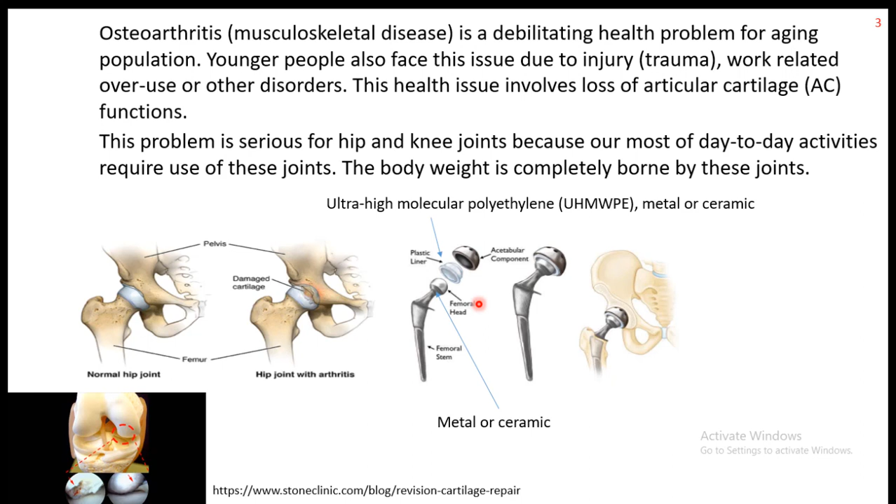If you look at our joints, it is a hierarchical structure of cartilage. Basically the bone is covered with cartilage, and cartilage is extremely smooth and a very lubricating surface. If you go into the structure, you will find that this cartilage has got the deep zone, the middle zone, and the superficial zone. The superficial zone is the one which is actually interacting with its counter surface.

In a healthy joint, as you can feel, the joints are very frictionless. Friction is extremely low. This is the characteristic of the lubrication system. Many lubrication theories have been proposed. It is believed that this lubrication is basically a mixed lubrication.

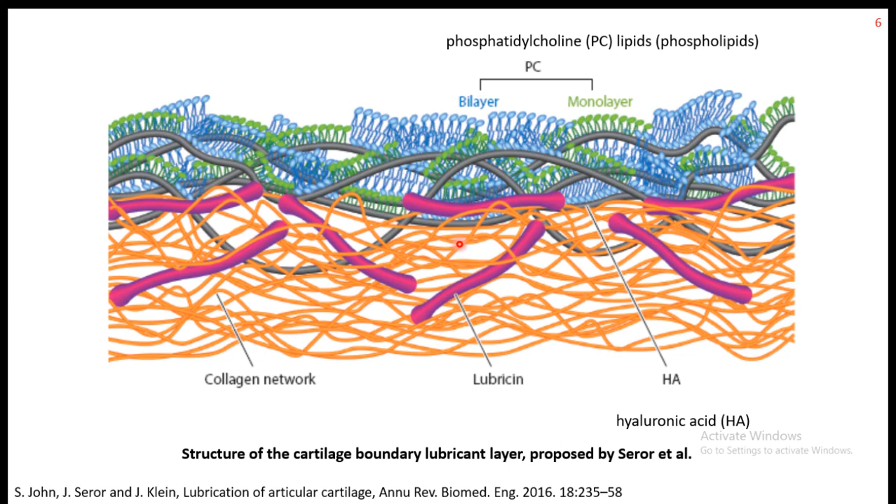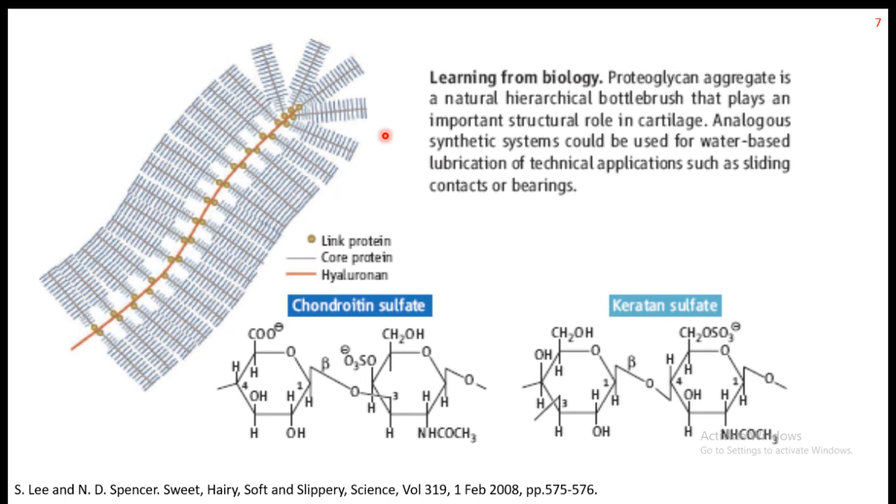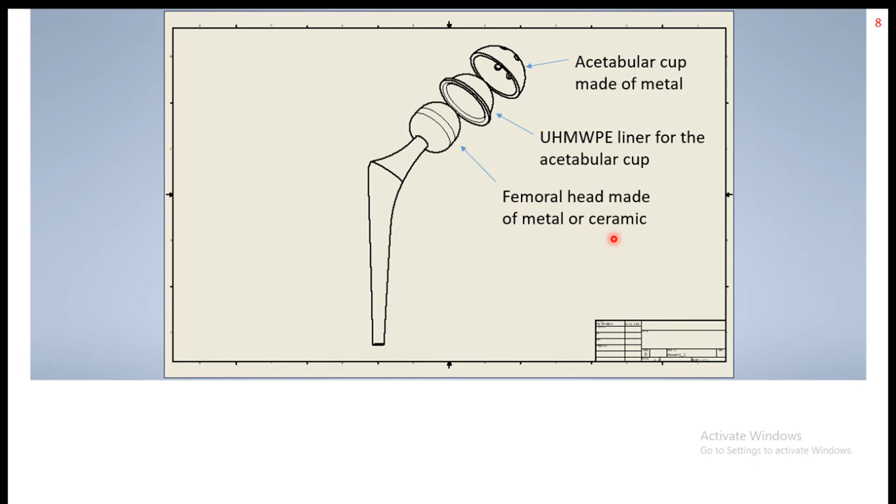Now here is more detail about how the implant is made. This is the acetabular cup made of metal, on the pelvic side of the bone, and this is on the thigh bone or femur, and this is the femoral head. So the sliding will take place between the UHMWPE liner, which is attached to the acetabular cup, and the head part, which is made of metal—cobalt, chrome, molybdenum—or it can also be made of ceramic.

UHMWPE has been the polymer part of hip and knee prosthetic joints since the 1960s. If you go into the history, this is a very successful polymer, and it started with Charnley, who introduced this polymer, and it worked very well.

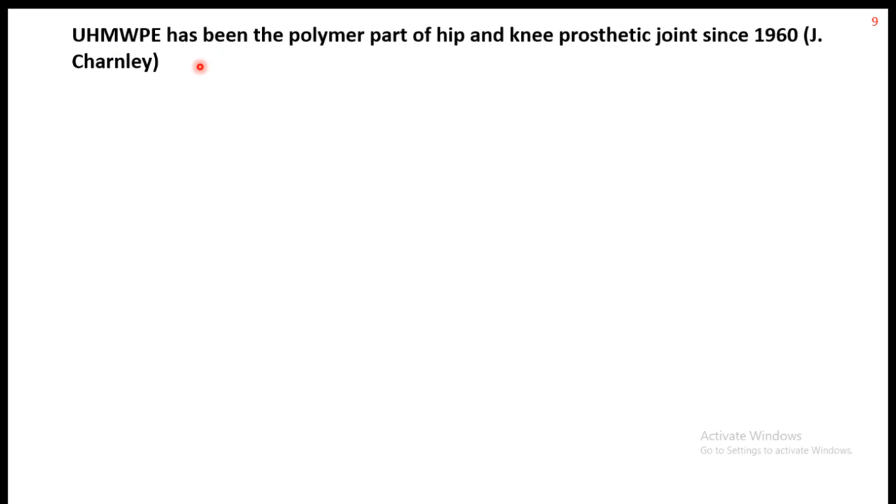Later it was further improved by cross-linking, so cross-linked UHMWPE showed improved mechanical properties. However, wear and fatigue properties deteriorated because of oxidative degradation, since cross-linking using gamma irradiation produced many radicals, which led to oxidation of UHMWPE.

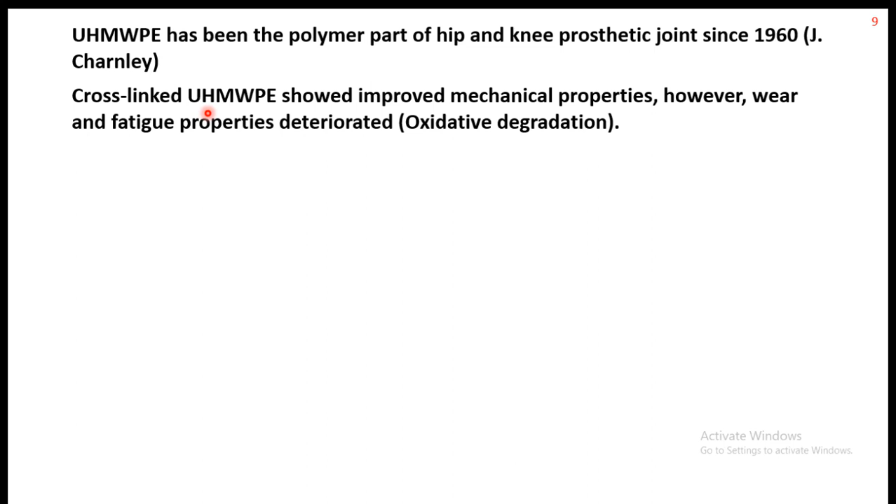Later vitamin E was included, and this solved the problem of oxidation because it acted as an antioxidant, and wear and fatigue problems caused by oxidation were reduced. So vitamin E has been used for cross-linked UHMWPE to improve its wear and fatigue properties.

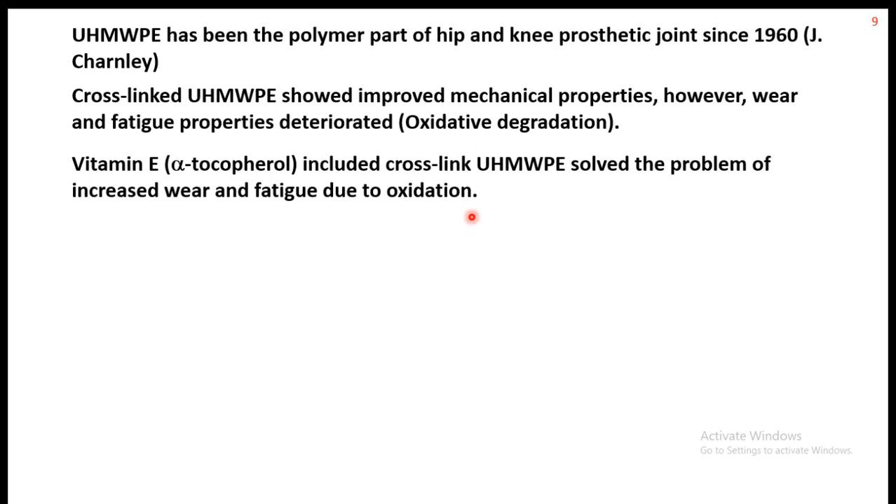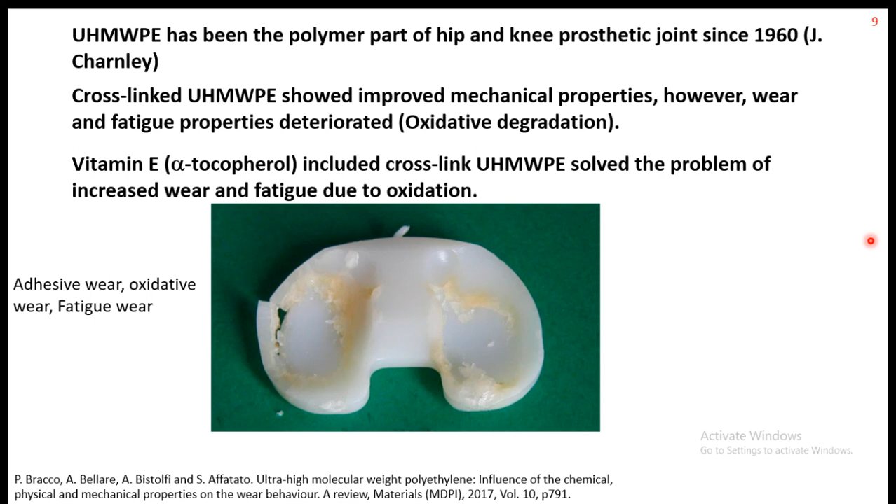The wear particles are not good for our body because these wear particles are taken up by macrophages. Macrophages exist in our body to consume foreign elements, whether bacteria, virus, or wear debris, which are micron to submicron in dimension. People have found that in tissues, UHMWPE particles are taken up by these giant cells, and the body reacts to this.

This means some inflammation and swelling will happen on or near the joints, and this can eventually damage the implant itself, meaning the implant has to be reinstalled. That means revision surgery, and revision surgery is not a desirable option for any patient.

So our goal is to make sure that the debris particles that come out of UHMWPE are as few as possible, and if they do come out of the implant, that they are not considered harmful by the body.

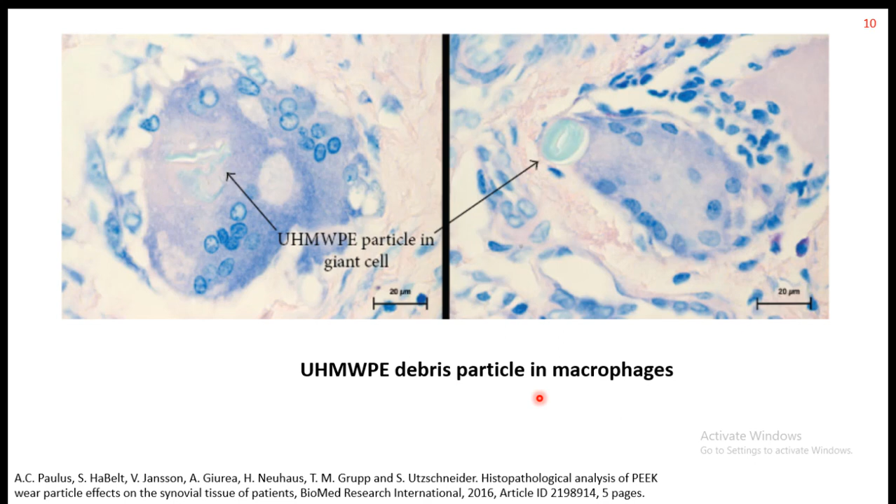Let us try to understand these materials we are working with. Basically these are within our control, the materials we use, UHMWPE and others. If you work with UHMWPE, you will understand the coefficient of friction it shows. In general, in dry interaction, meaning UHMWPE dry sliding against a metal surface, you get quite a high coefficient of friction. But with lubrication using bovine serum liquid, the coefficient of friction comes down, showing that it responds to lubrication.

In general, the specific wear rate we see is in this range, around 3.93 times 10 to the power minus 7 millimeter cubed per Newton meter, which is the unit of specific wear rate. We always compare this number whenever we try to replace or improve UHMWPE. At least the wear rate should go down; only then can we say we have improved the material.

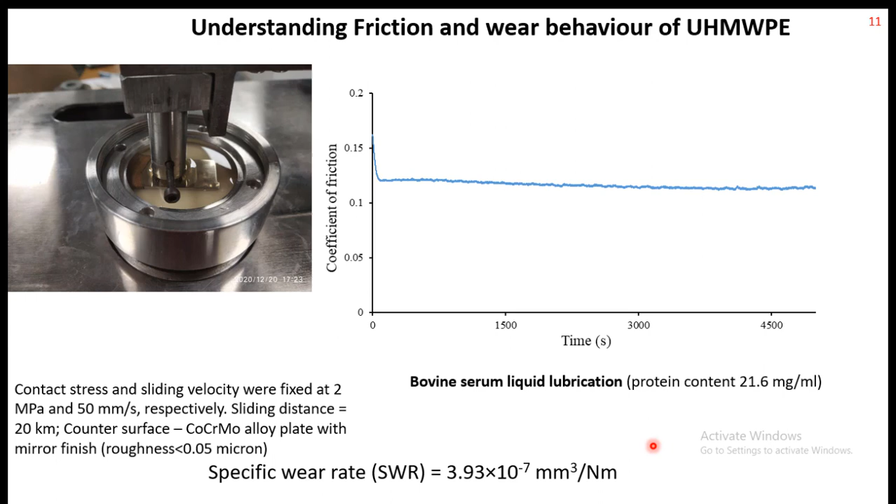So what other material options do we have? We can make composites of UHMWPE, adding particles or fibers to it. Another material that has been tried is PEEK, or polyether ether ketone, and its composites. Hydrogels are another useful group of materials, and the most famous hydrogel is PVA, or polyvinyl alcohol.

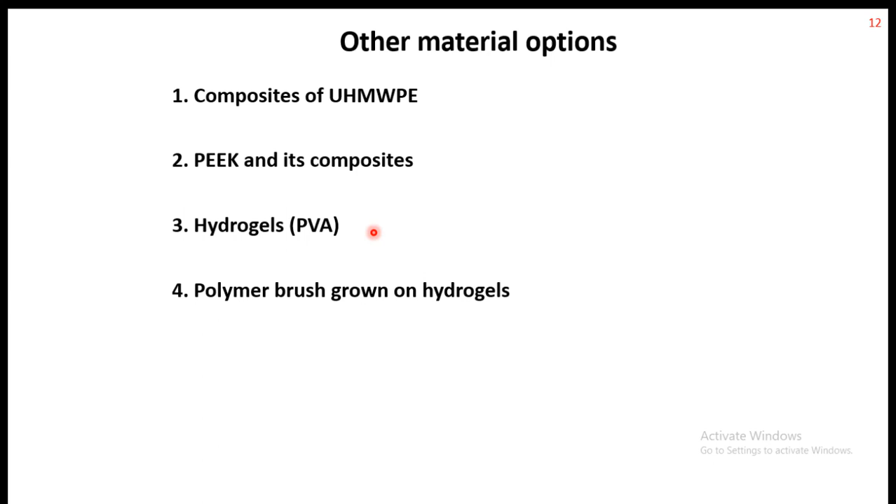Then there's polymer brush grown on hydrogels. Different kinds of polymer brush have been prepared, and they basically mimic the proteoglycan behavior, which also acts like a brush. If we have these brushes on top of hydrogels, then perhaps this can mimic our cartilage to some extent.

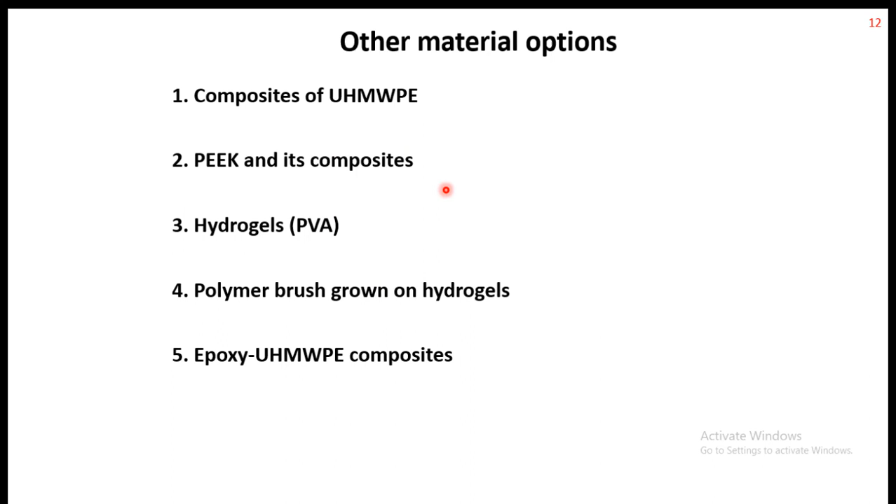Another combination of material we have been working on is the epoxy and UHMWPE composite. I will show you data on these alternatives to UHMWPE, as well as on the fifth one, which is our research topic.

So for example, if you look at the literature on UHMWPE composites, here for example Multiwall CNT has been added to the UHMWPE. Wear rate has gone down, and friction coefficient has also gone down in dry condition as well as in lubricated condition. This is for dry condition, and this gray one is for lubricated, where they used distilled water as a lubricant.

Here I should say what kind of lubricant we can use. Many times researchers use distilled water, but also people use bovine serum, which is closer to our actual synovial fluid. So the wear and friction behavior will depend upon what kind of material we use as a lubricant, and dry property will be quite different. We generally start with testing in the dry condition, and later move on to the lubricated condition, which is closer to the actual joint.

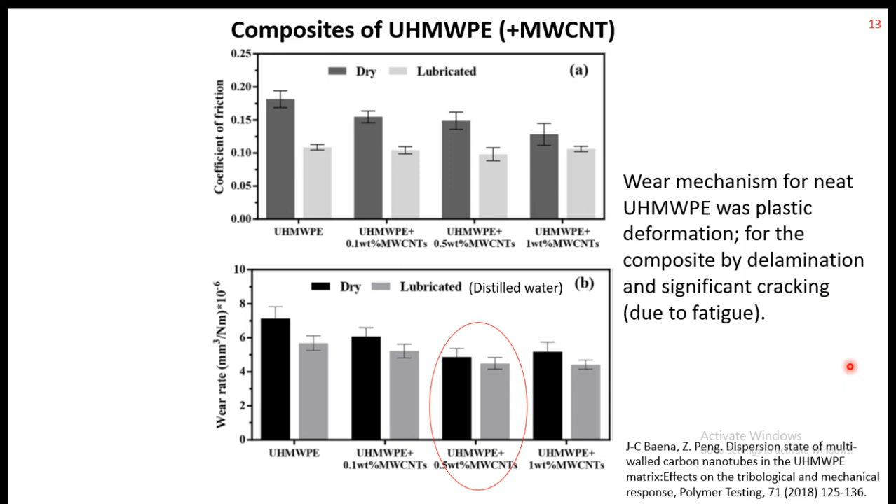Some of our works have also been represented here. We prepared specimens of pure UHMWPE, then UHMWPE with PFPE coating, which is perfluoropolyether, then 12% nacre UHMWPE, and some percentages of CNT. These tests were conducted on a pin on disc apparatus, so these specimens acted as the pin, and we had a disc of stainless steel, sliding in bovine serum as the lubricant.

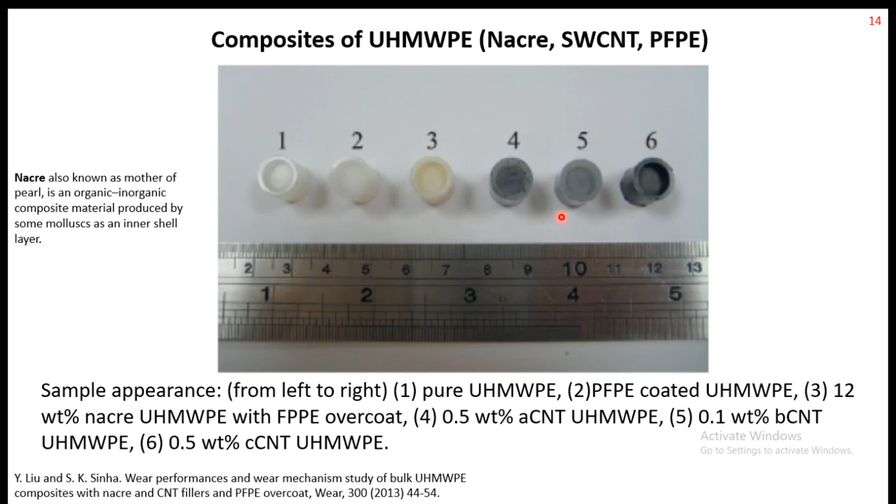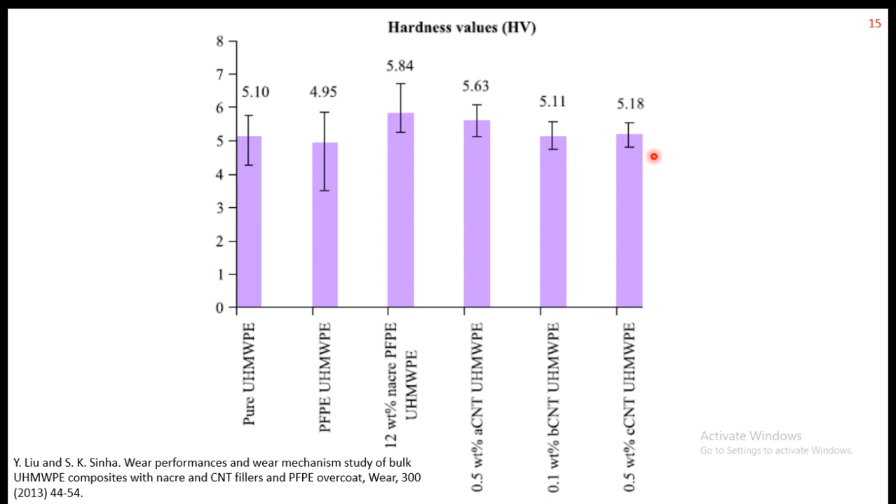First of all, when we conduct this kind of tribological research, we start with finding out the mechanical property, the bulk mechanical property, and we find out the hardness. Hardness will change if you add some fillers. However, in this case we have seen that the change is very minimal, not much, except in one case. So more or less the material remains the same in terms of its bulk property.

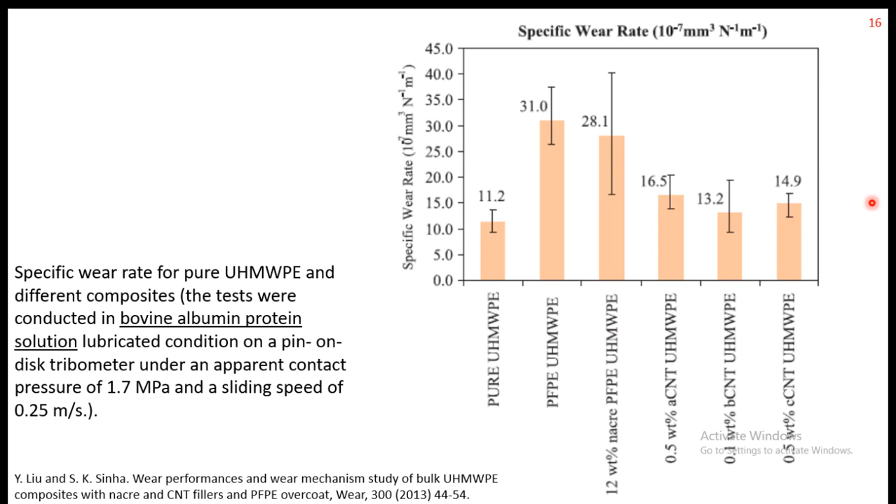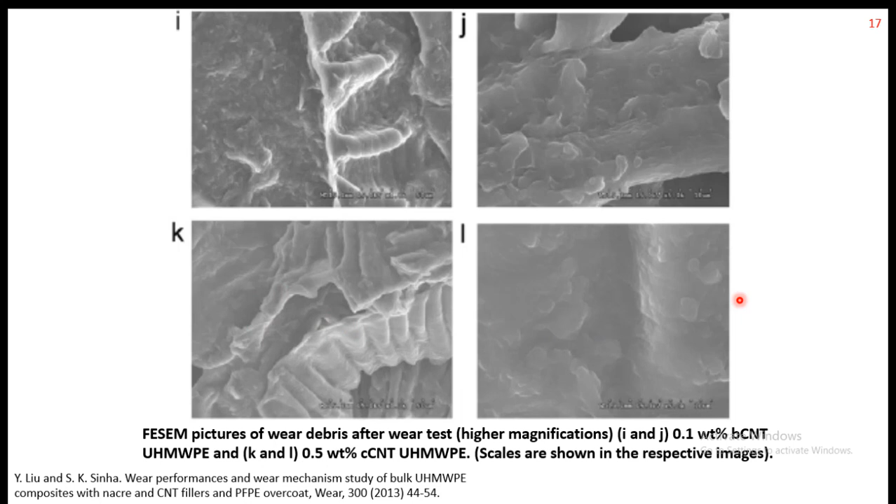So in our work we concluded that particle reinforcement or liquid lubricant such as PFPE added to UHMWPE has not improved wear resistance, or the improvement was very minimal.

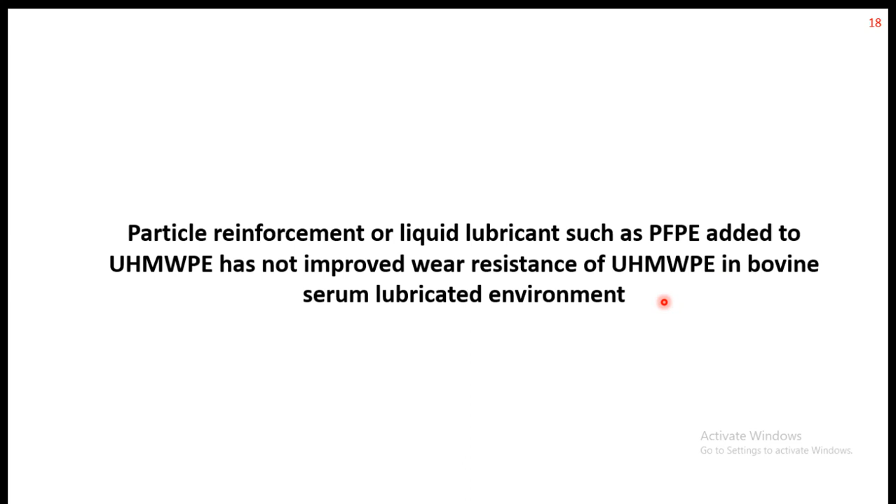Other types of composites people have formed involve adding carbon fiber to UHMWPE. As we know, adding any kind of strong fiber like carbon fiber, Kevlar fiber, or glass fiber will improve the bulk property, and in many cases it will also improve the tribological properties. So here we have carbon fiber addition to pure UHMWPE, for dry sliding. Again, the apparatus was block on ring, with liquid or in dry condition.

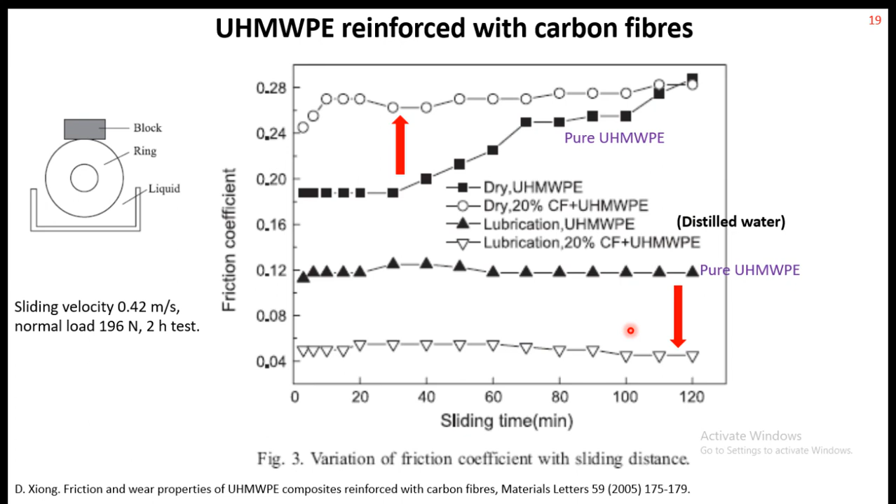For dry condition, the composite gave a slightly higher coefficient of friction, but for the lubricated case, comparing pure UHMWPE and the carbon fiber composite, there is a drastic reduction in the coefficient of friction. So here we see that having carbon fiber in the matrix of UHMWPE has helped in the lubricated case. Again, the experiments were done using distilled water lubrication, so we need to also check how the results will look if we use bovine serum as the lubricant.

Again, I should tell you that in bio-tribology we may start with pin on disc test, but we have to move on to a cross shear type of test. One such test is called multidirectional pin on disc, or MDPOD. Beyond that we should use a simulator. All these tests are done in vitro, so we need to evaluate the performance of the material in a simulator before any further in vivo trial can be done. So it's a long process.

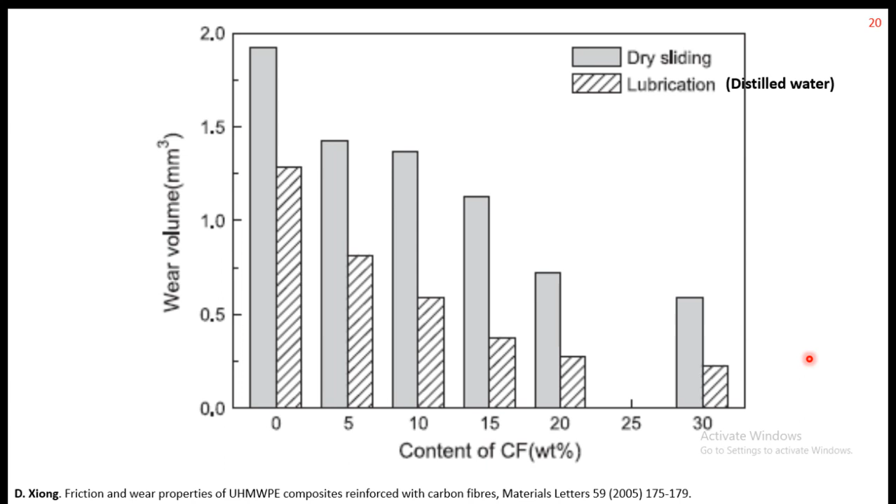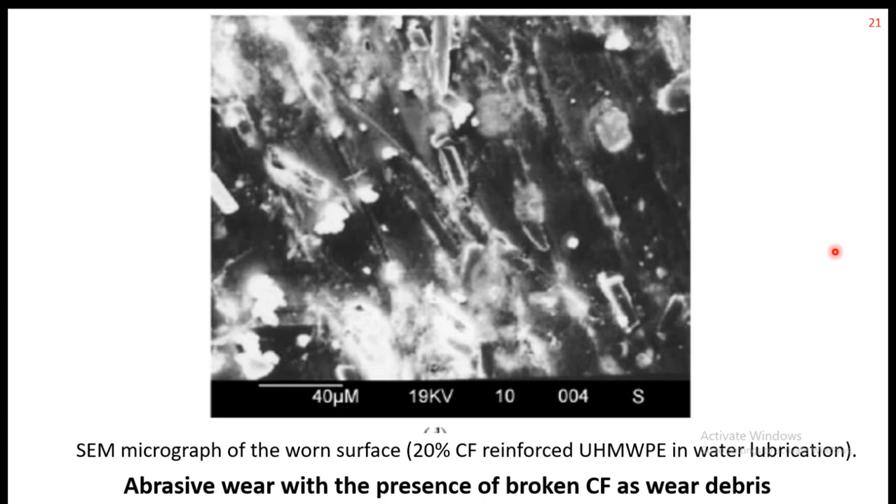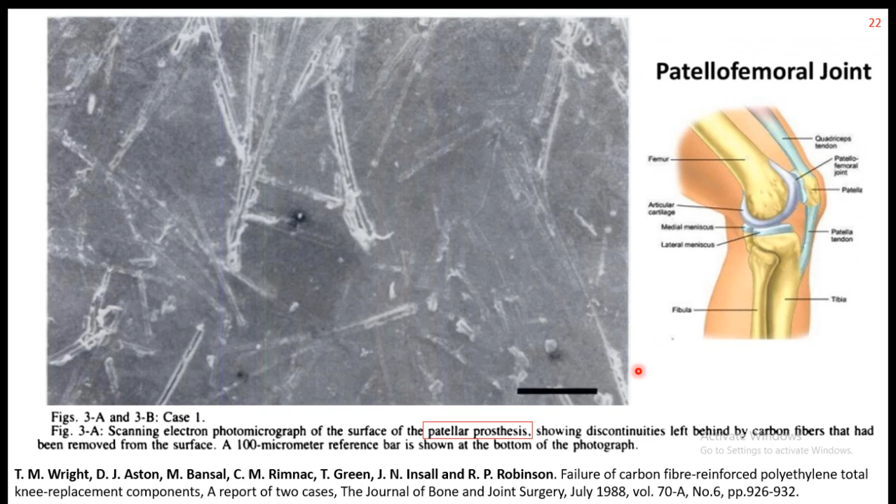In fact, UHMWPE and carbon fiber composite has been tried clinically. This is a paper where failure of carbon fiber reinforced polyethylene was studied. In some patients it did fail, so those failed specimens were looked at, and what they found is that on the surface where sliding takes place, the fibers actually get pulled out, because these fibers are in a horizontal orientation on the surface, and they get easily pulled out because of the shear stress. This is one big issue, and because of this reason, this composite was tried quite early on in 1988, but since then it has not been tried so much.

What the authors of this paper found is that the failure was related to poor bonding between the fiber and the matrix - matrix being UHMWPE and the fiber being carbon fiber. So it was more of a manufacturing issue rather than a material issue. Perhaps this type of system can be tried again, and the manufacturing part has to be resolved - the bonding between the fiber and the matrix has to be good. Fatigue failure due to poor bonding between the carbon fiber and the polyethylene particles, and poor fusion of polyethylene particles during compression molding, was mentioned as the possible cause of failure. However, these kinds of composites have not been tried since then, basically out of fear about the issues that happened for these patients.

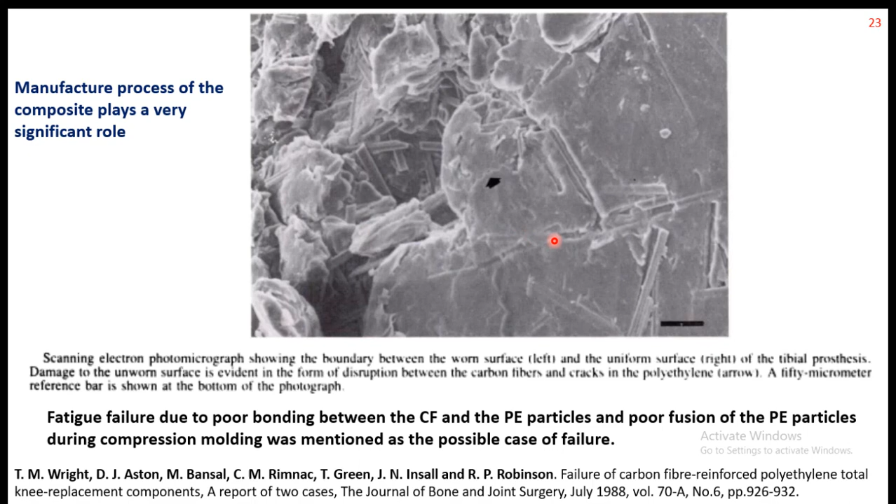Another type of combination is PEEK and its composites. As you can see in this paper, some researchers have started working on PEEK, polyether ether ketone, as a replacement for UHMWPE. PEEK is a very good engineering material - it has better mechanical strength compared to UHMWPE, almost double, and better creep resistance as well. But tribologically, PEEK is not as good as UHMWPE - it gives slightly higher friction, and wear is also high in the dry case.

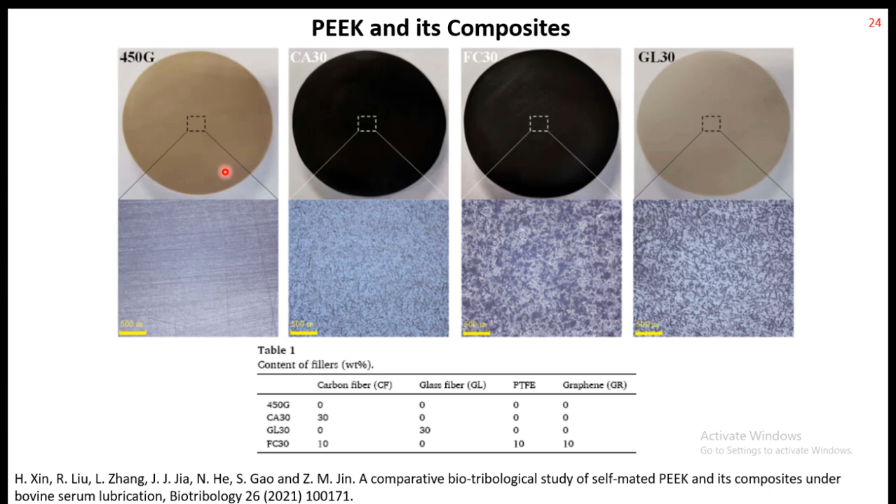The authors have tried different composites: one with carbon fiber, another with carbon fiber and graphene, and another with glass fiber, along with pure PEEK material. The new thing they tried is sliding the polymeric part against itself - another polymer - so the pin is polymer and the disc is also polymer, rather than sliding between polymer and metal or ceramic. The idea is that this can give a lighter system, and it will also reduce or eliminate the problem of metal ions being released from the metal part, which goes inside our body and causes harm. So having both sides as polymer would be an advantage.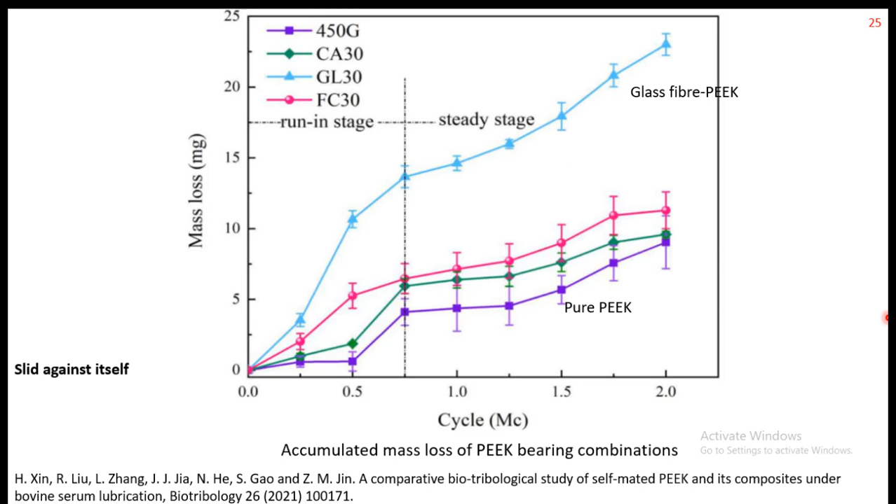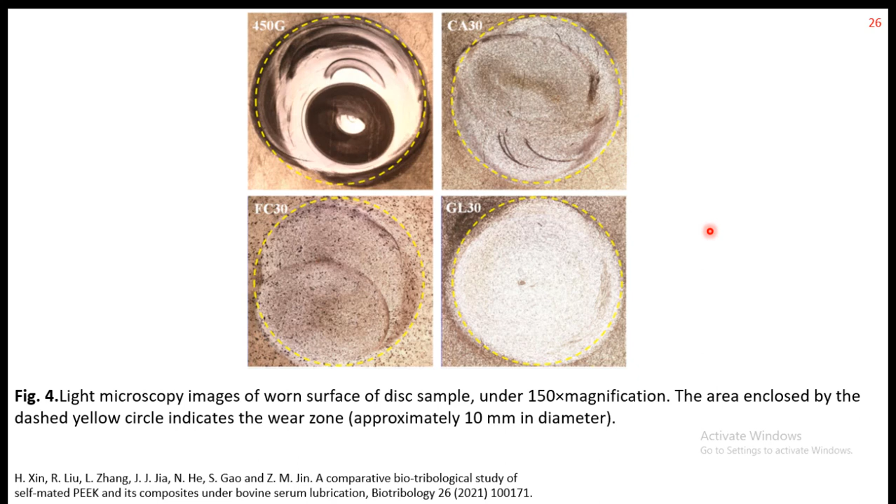It was not compared with metal, so we can only see the results of this polymeric material against polymeric material. This shows the wear surface, which gets a completely polished surface, and here you can see the glass fiber reinforced PEEK where we get a higher wear rate. So everything is within our expectation, and hopefully polymeric material against polymeric material might be another choice.

However, if we look at the failure of the polymeric composites, in this case the glass fiber one, you can see lots of pull out of the fiber. These fibers are longitudinally arranged on the surface, though in the bulk they are random. On the surface they get pulled out during sliding. As you know, this sliding is not full liquid film but rather mixed, so there is always a possibility of dry interaction between the two surfaces.

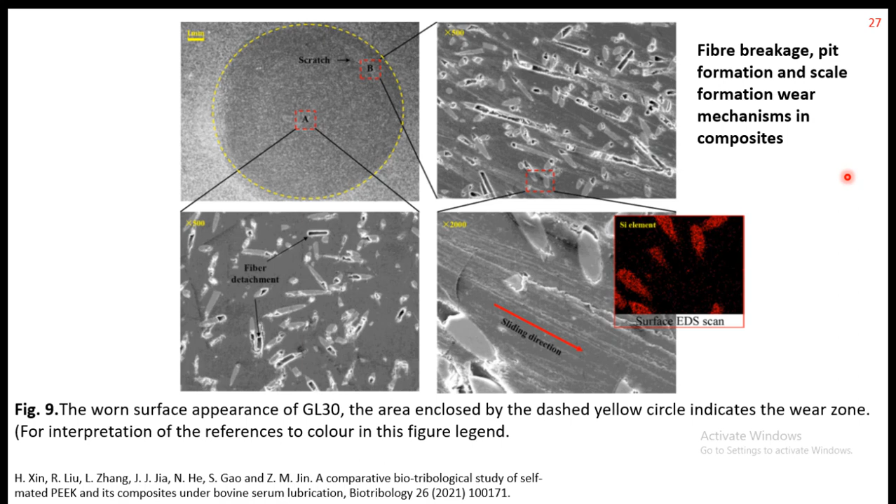In another work, PEEK was used and slid against UHMWPE. That means if we have the acetabular cup of UHMWPE, then PEEK is the other part, or the femoral head. Here we have a comparison with metal sliding against metal, cobalt chrome molybdenum.

People have shown that when PEEK is sliding against cross-linked UHMWPE, it gives far better results. The disc material is PEEK here, and cobalt chrome is this one when the disc material is cobalt chrome, and this result is for the wear of the disc part. As you can imagine, in a pin-on-disc machine test, both the pin and the disc wear out. We can see that wearing of the PEEK disc is much less compared to cobalt chrome molybdenum, and the pin of PEEK was also wearing less compared to cobalt chrome molybdenum. Overall it is concluded that PEEK sliding against UHMWPE has better results than cobalt chrome molybdenum sliding against UHMWPE.

However, I should say that this kind of result needs to be verified by a third party, because in this work the research itself was supported by the company which made the PEEK. So it needs to be verified by independent research.

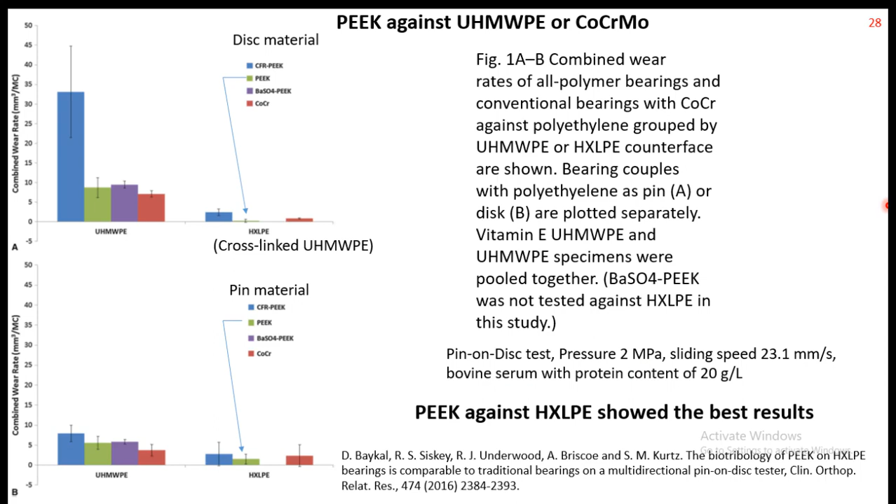Another material that we have is the hydrogel, polyvinyl alcohol, PVA as hydrogel. PVA or this kind of hydrogel is being used for many other purposes within our body system, but for the joints, hip or knee joints, this has not been clinically tested. However, in vitro tests have shown good promise.

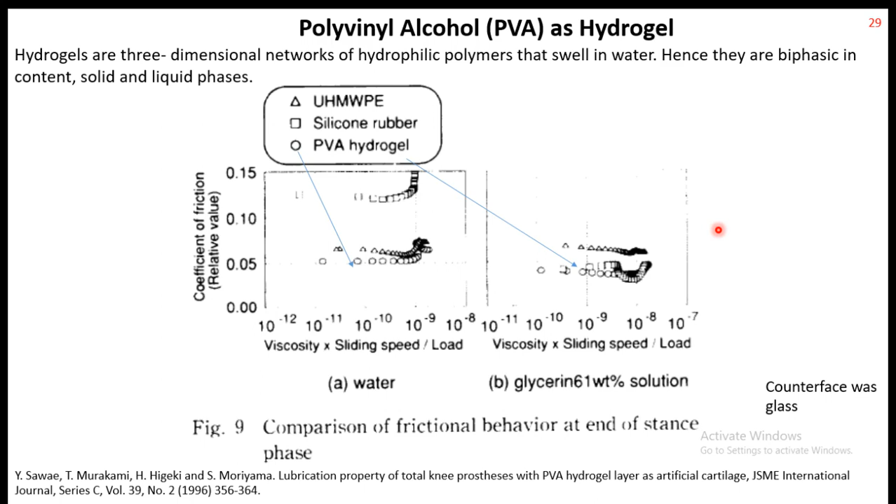Quite early on, in 1996, PVA was used and some tribology tests were conducted, and it was found that PVA gives better results compared to UHMWPE when sliding against a glass surface in a simulated lubrication system — in one case water, in another case glycerin 61 weight percent with water solution. So PVA or hydrogel is being tested by many research groups presently.

Further on, the same group conducted tests with PVA gel, the freeze-thaw gel, and the cast-dried gel. Just different ways of making these hydrogels, and it was found that PVA CD, the cast drying process, gives a better result than the FT. Perhaps the hybrid one will give some better result.

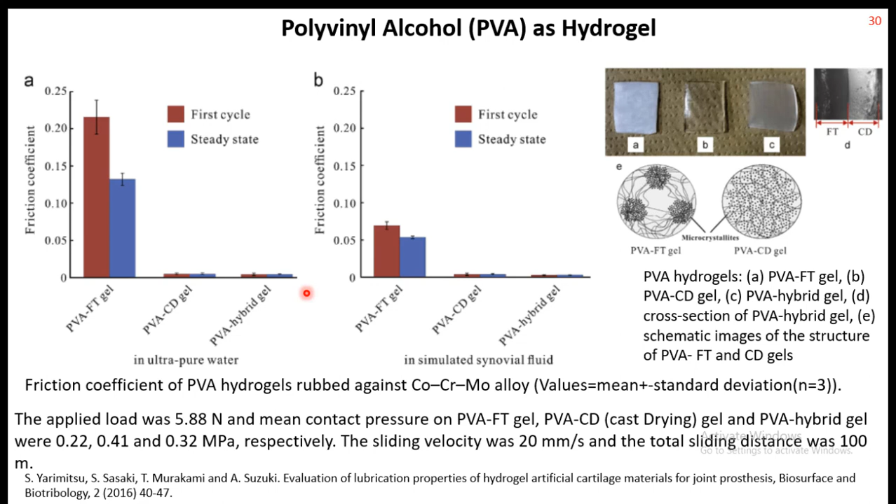These changes were because of structural differences. For example, the PVA freeze-thaw process gives microcrystallites which are aggregated at some places, whereas in the case of PVA CD gel, the microcrystallites are uniformly distributed throughout. Because of this, PVA CD is transparent, whereas PVA FT is opaque. So there is a difference in crystalline structure, and overall PVA hybrid gel, a combination of FT and CD, gives a better result. So PVA hydrogel is another choice we have, other than PEEK and UHMWPE composites.

Not much work has been done on the wear aspect of hydrogel, but some results show that perhaps PVA FT, or freeze-thaw process, gives a better result with less wear compared to PVA CD. This part needs to be properly evaluated in vitro in our pin-on-disc machine or multi-directional pin-on-disc machine, so we can understand how the PVA gel will perform in an actual system.

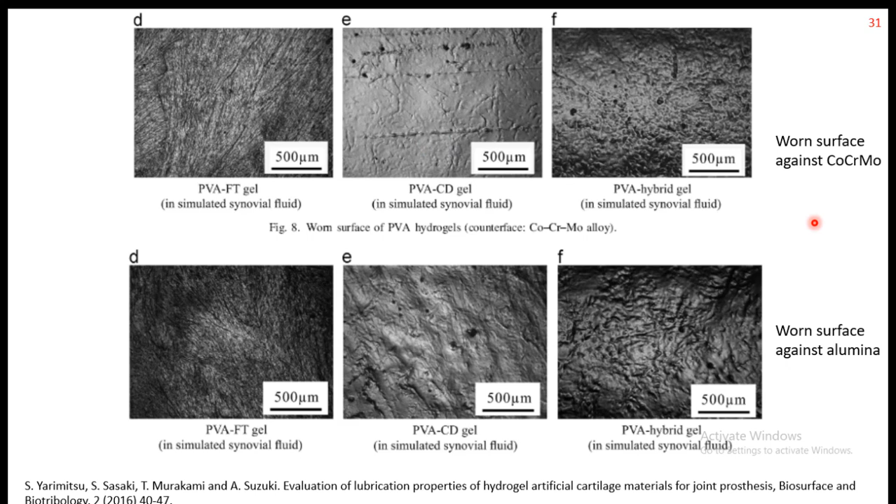Friction-wise, we have found that it gives quite a low coefficient of friction.

Another solution people have researched is called zwitterionic polymers, used as a boundary lubricant on the hydrogel. These zwitterionic polymer molecules are net neutral, just like our proteoglycans. They are net neutral yet possess both positive and negative charges in close proximity to each other, often along a carbon chain backbone.

They have strong interaction with water molecules, so perhaps this kind of polymer molecule will mimic proteoglycan and encourage water lubrication. These zwitterionic polymers can be included within the hydrogel at its surface so that they provide lubrication, whereas the bulk of the hydrogel provides the mechanical strength to the implant. Perhaps future solutions will be a combination of this kind of hydrogel and zwitterionic polymer, or some other composite with zwitterionic polymers.

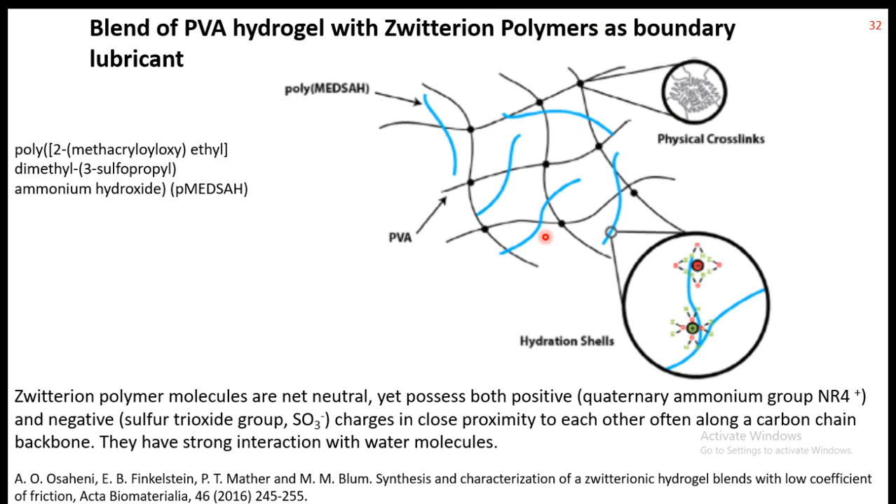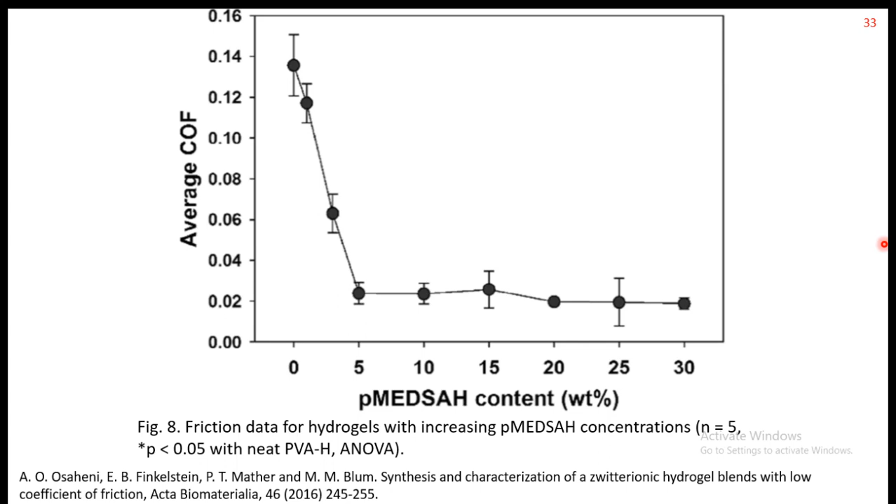In this case, they conducted a friction test and found that adding even 5% of zwitterionic polymer reduces the coefficient of friction to a very, very low value, and it continues. So the friction mechanism is well established, but on the wear side we do not have much data.

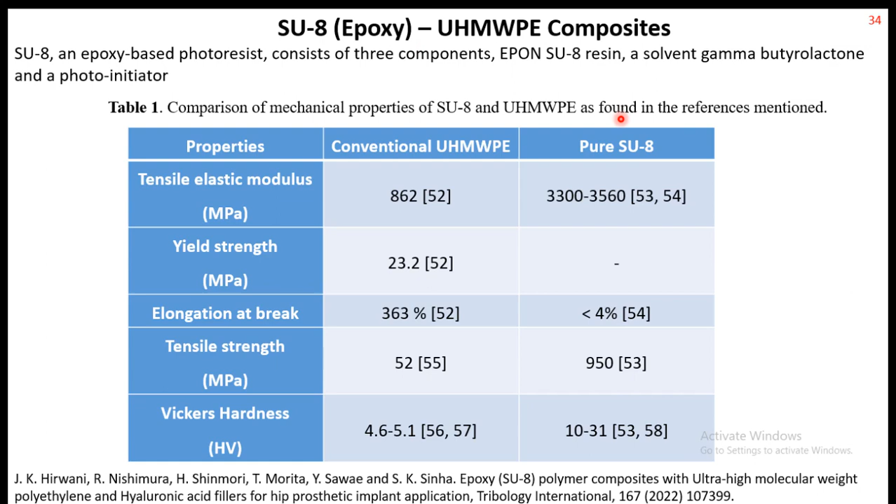But if we add these particles of UHMWPE into SU-8, it gives a far better result, as we will see.

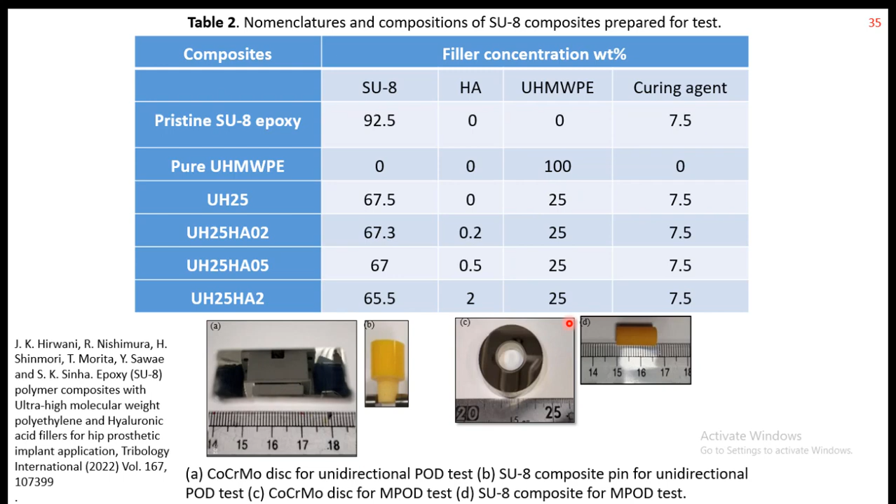The samples were made into pin form and then slid against a metal part, a cobalt chrome metal surface, in a multi-directional pin-on-disc test. I'll show you some results with different percentages of HA, but UHMWPE percentage was fixed at 25% weight, and these were also compared with pure UHMWPE.

This is a new wear test we developed. One of the problems with...

Sujit, sorry for interrupting. We're coming up to about 10 minutes left of our general hour for the event. Do you have many slides left? A couple — how many minutes do I have? We'll say another 5, then we'll do the sponsor section and Q&A. Sure, I will finish in 5 minutes.

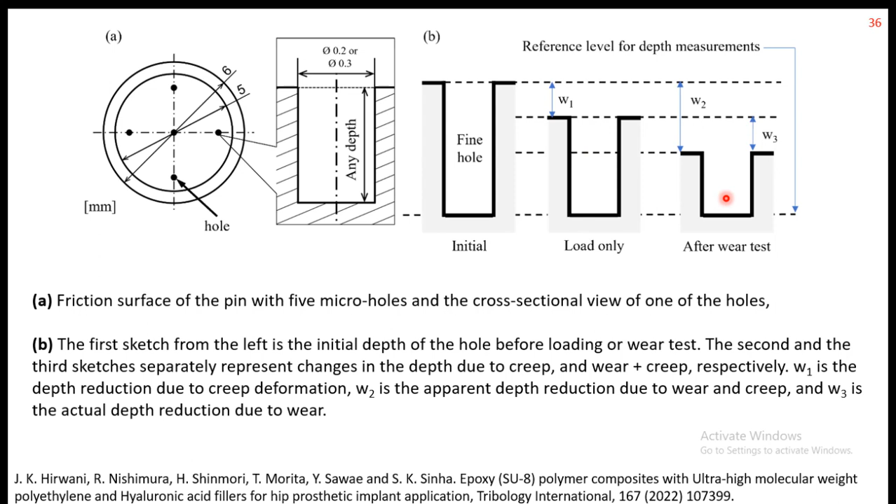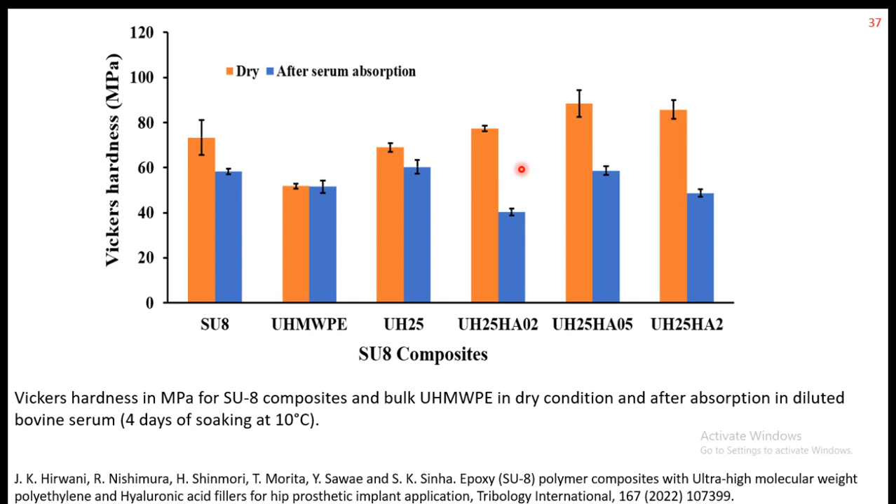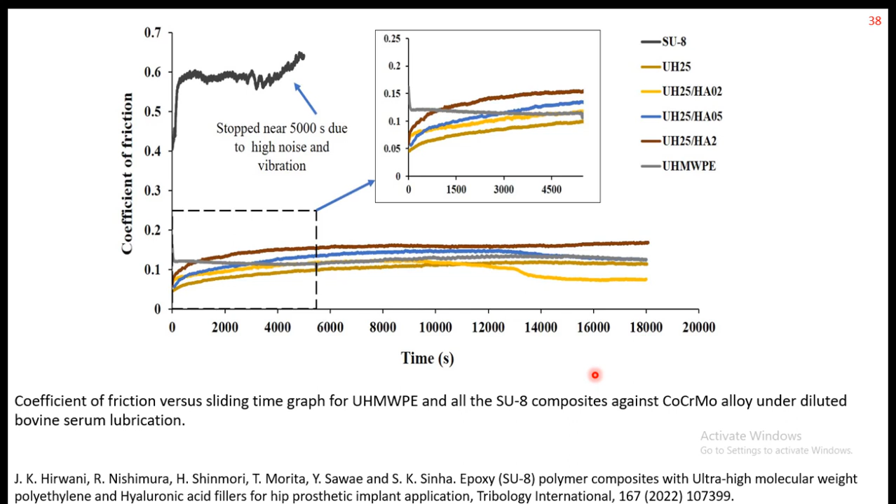It was also slid for quite some time, with the number of cycles more than 200,000. So this gives a very good system to work with.

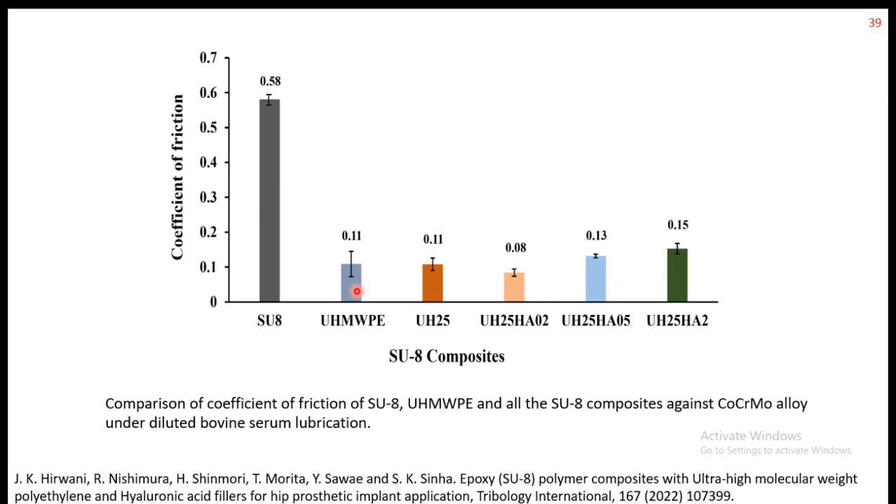In terms of wear, which is another important part, we found the average coefficient of friction in the steady state gives a low coefficient of friction for our composites, even compared to pure UHMWPE. This is very, very encouraging.

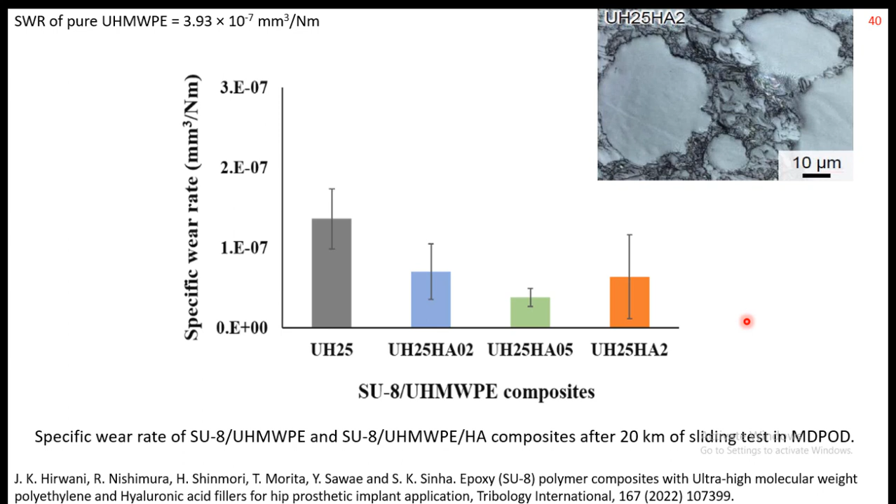We also compared the wear rate, and even though there is a lot of scatter in this kind of evaluation, our composite of 25% UHMWPE and 0.02 or 0.05 HA gives a low wear rate. This is compared to pure UHMWPE, which gives 3.93 times 10 to the power minus 7, much higher than our composites. Overall, we have achieved very good low friction and low wear conditions for these composites in our multi-directional pin-on-disc test.

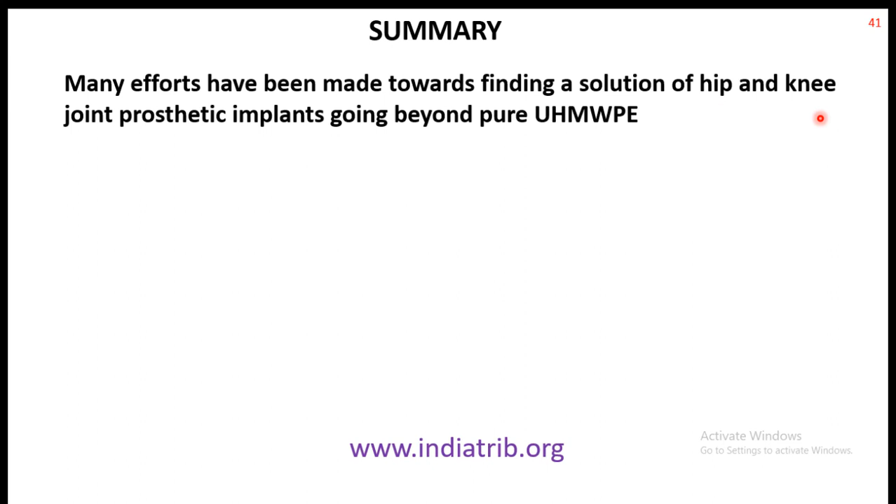So finally, I will summarize. Many efforts have been made towards finding a solution for hip and knee joint prosthetic implants going beyond pure UHMWPE. Pure UHMWPE is still a very good material, but we need to find some replacement or improvement. PEEK with cross-linked polyethylene has shown promise, but needs to be re-evaluated, and it is very important that it is re-evaluated.

PVA hydrogel, in combination with a zwitterionic polymer boundary lubrication, provides another promising material which is non-UHMWPE. From our research, we have found that epoxy, SU8, or similar thermosets with UHMWPE particles and a boundary lubricant can hold another promise for future evaluation. So this is all about what has been done in biotribology research for non-UHMWPE polymeric systems.

SRV Tribo Talks. I would like to invite you to take a look at some of the many tribological solutions we and our customers have developed on the SRV test system. For example, the SRV allows you to generate tribo contacts with complex 3-axis movements and measure them in 4 dimensions. The high practical relevance of the simulation and relevant measurement data create valuable knowledge about your product. The ability to use your own prototypes and series parts in the SRV test environment is key to achieving relevant results quickly. To this end, you benefit from an installation space of 50 x 40 x 200 mm. Your components can be tempered up to 300 degrees centigrade.

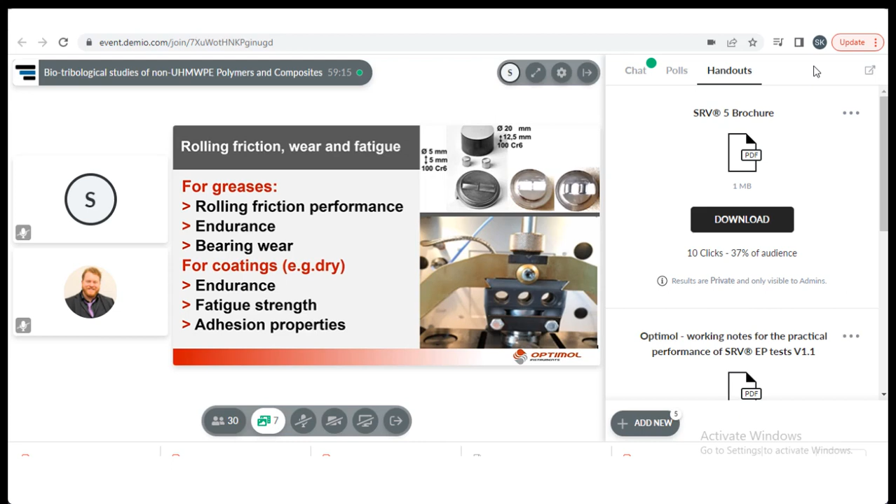Rolling bodies are found in bearings and gearboxes, often as lubricant systems, but increasingly also dry running. With the SRV, we enable you to screen your greases and coatings under realistic load collectives with relative speeds up to 1 meter per second. Using multi-axial movements and test setups, you can transfer complex movement sequences to model testing in the SRV and thus test the real system on a laboratory scale. The results can be transferred directly into practice or simulation.

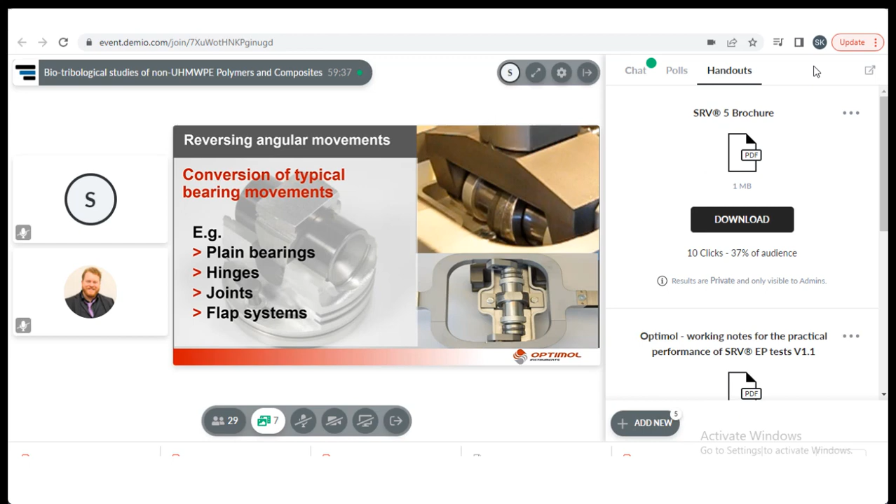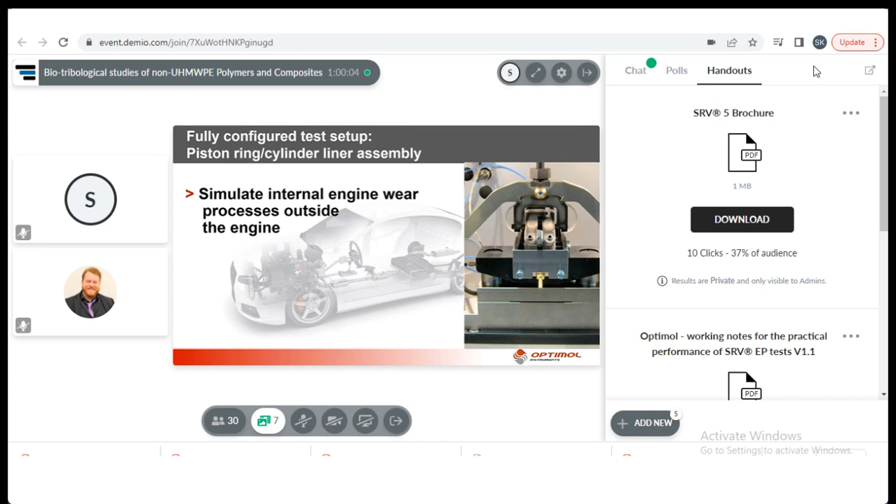A very well-known example of such movements is the piston-pin rod-eye contact. Here, the SRV allows you to simultaneously test pin materials, bearing materials, and engine oils in one test setup. Tribological model tests provide insights into tribological systems that are otherwise difficult to access. The simulation of internal engine wear processes outside the engine is an impressive example of this. The metallurgical properties of your materials under the influence of temperature can be analyzed in a range from -45 to +1000 degrees centigrade. The simulation scope varies from simple abstracted test geometries to original parts.

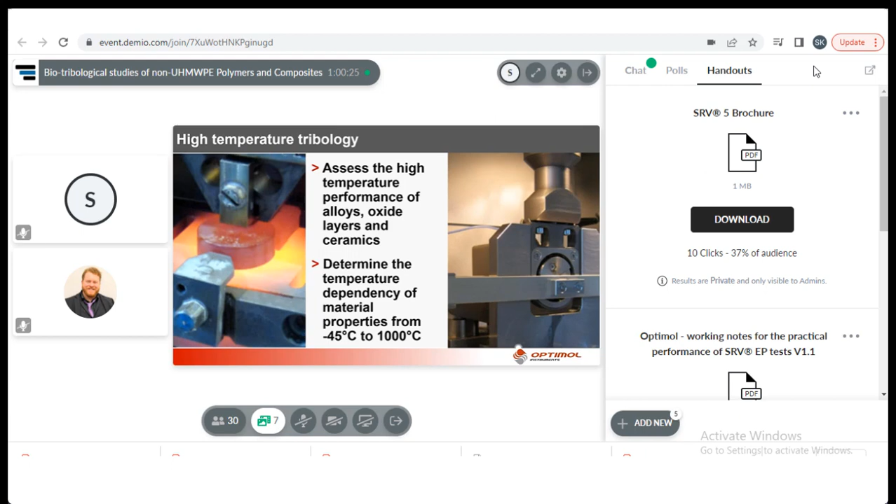The test setup shown is used to evaluate high temperature materials and plain bearings. The SRV's ability to represent tribo contacts extremely realistically in a model environment is one of the reasons for its worldwide success. Do not hesitate to call us if you want to address a friction and wear related problem through tribo testing.

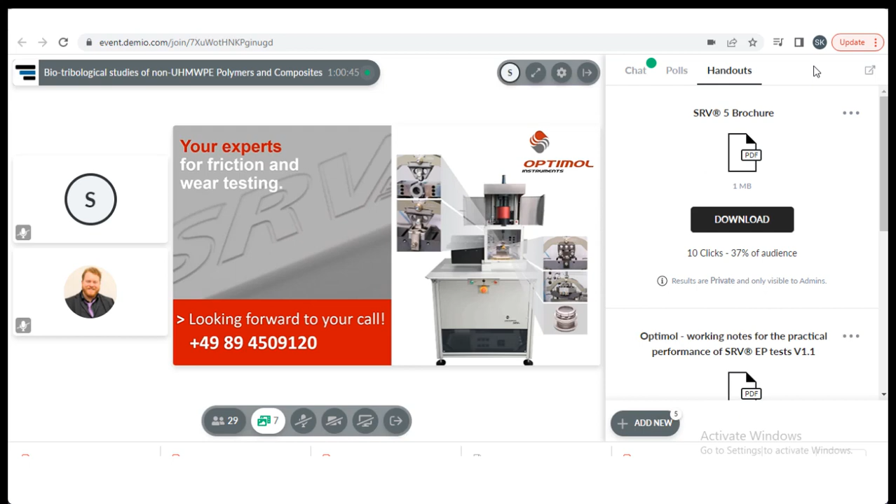Okay, great stuff. So that was Gregor Patzer from Optimol, recorded there, talking about the SRV platform.